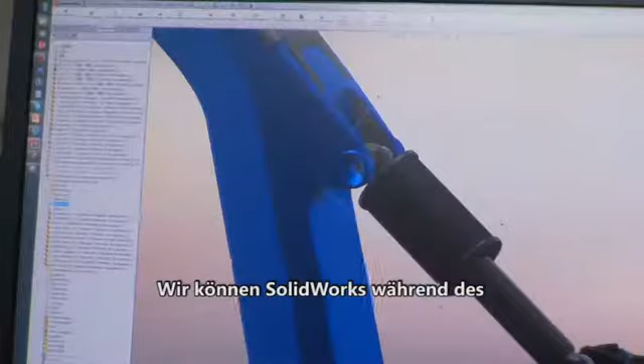For us, SOLIDWORKS can be used during the whole product development process. This allows us to recognize a needed change in one discipline. You immediately can recognize the effects on the design or on the ergonomics, and you can react. So your product will finally look like your basic idea, and that's very important.

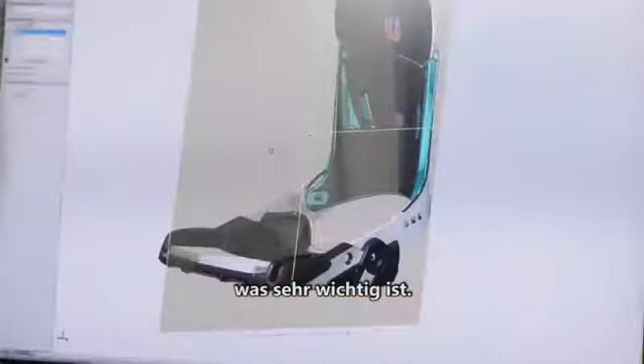I started with 2D software, and we had real problems realizing the designs. Matthias came and showed me SOLIDWORKS, so in the end we decided to work with SOLIDWORKS.

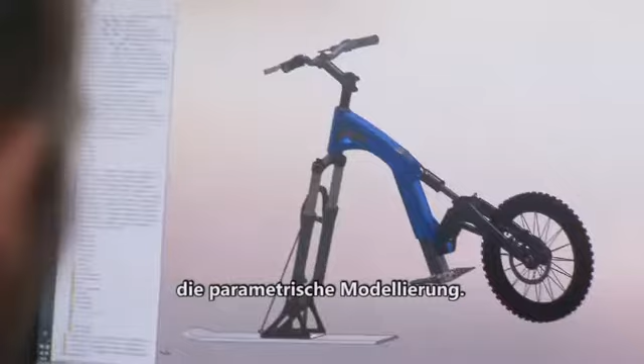At the beginning the most important feature was the parametric modeling, that you can create designs without dimensions and afterwards make them more precise step by step. Especially for snowboard bindings, they have lots of free-form shapes, so to fit the human body you can only describe them with the help of a 3D program.

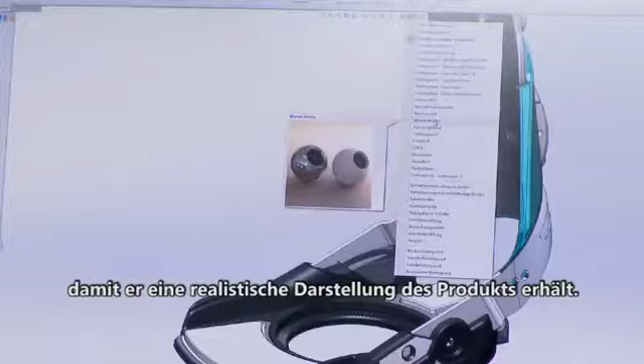The PhotoView 360 is very important for the client to have a realistic rendering of the product. Very often the marketing department makes the decisions, and they need pictures.

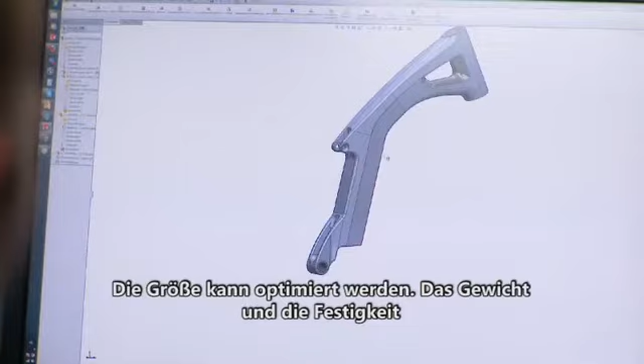With Skibike, SOLIDWORKS was really good because you hike up with the bicycle on your backpack, so you need a very small size. You can simulate it in the computer, optimize the size, and optimize the weight and strength of the whole bike, so it's a complete lightweight design. You can switch over to the simulation, go back to the product, and know where it's weak. SOLIDWORKS was the perfect tool to do it.